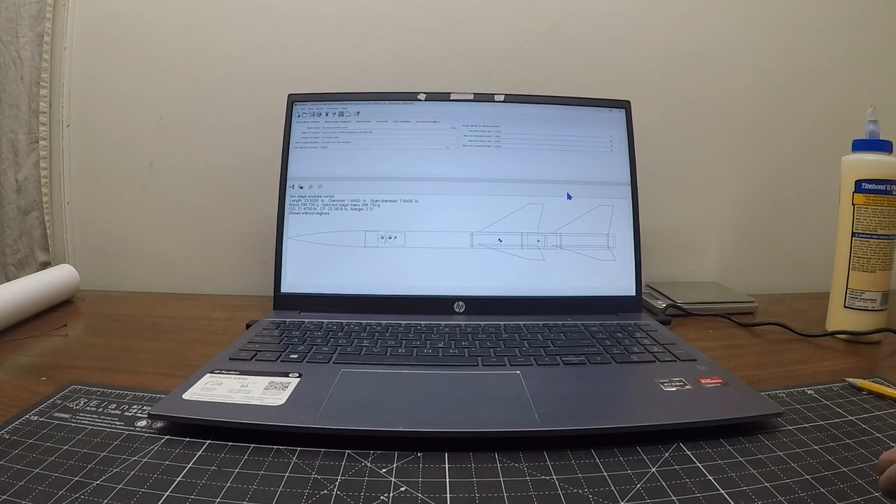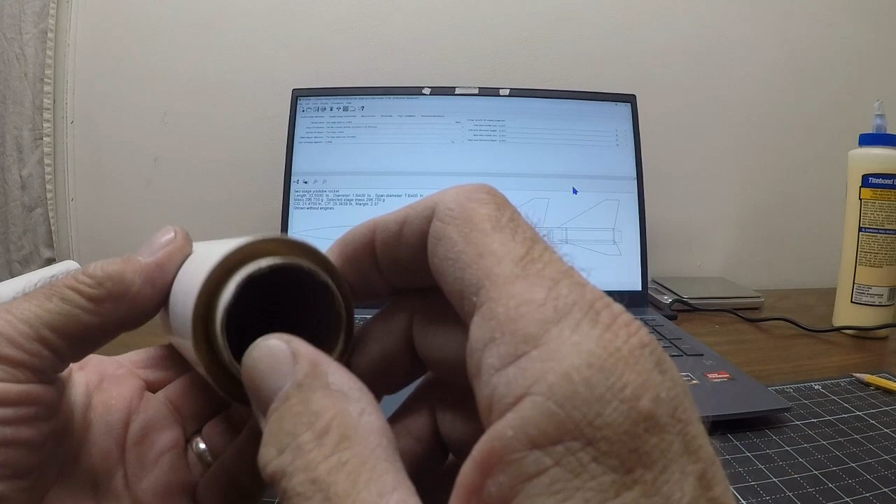So let's get this rocket built. I went ahead and cut the body tube for the booster section, 7.5 inches long, and I went ahead and mounted the engine mount in here. And it's the same exact way as putting it in the main body.

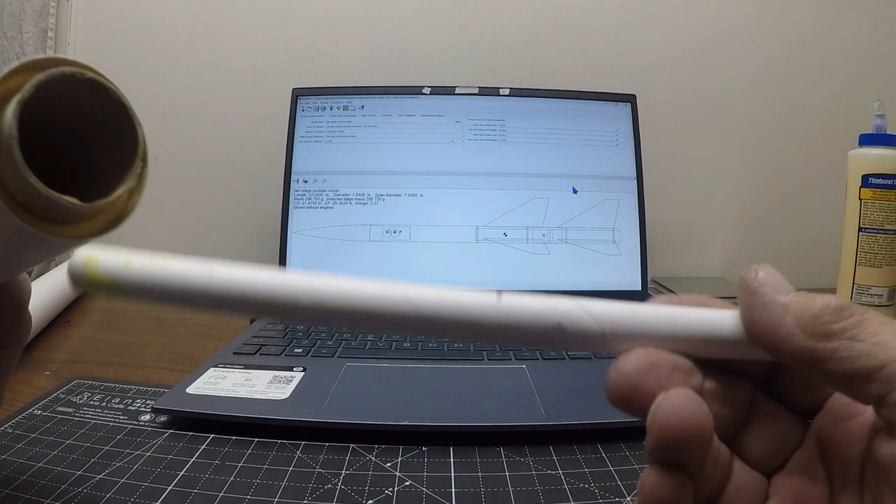I took my glue tube, I marked it at 5 inches and put my glue on the tube and put it on the inside there and slid the engine mount in and left it sitting up like this and let the glue set up for a few minutes until it wouldn't run when I turned it over, and then I glued the bottom centering ring. Alright, and then let that dry and that's ready to go.

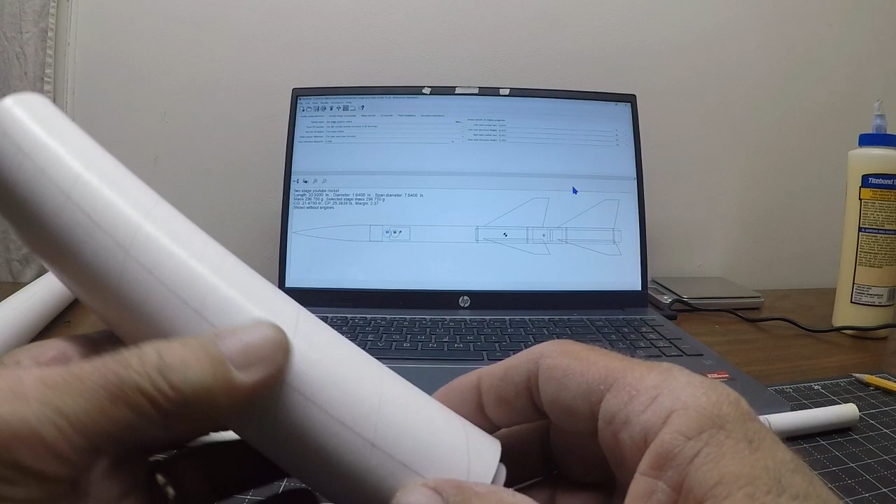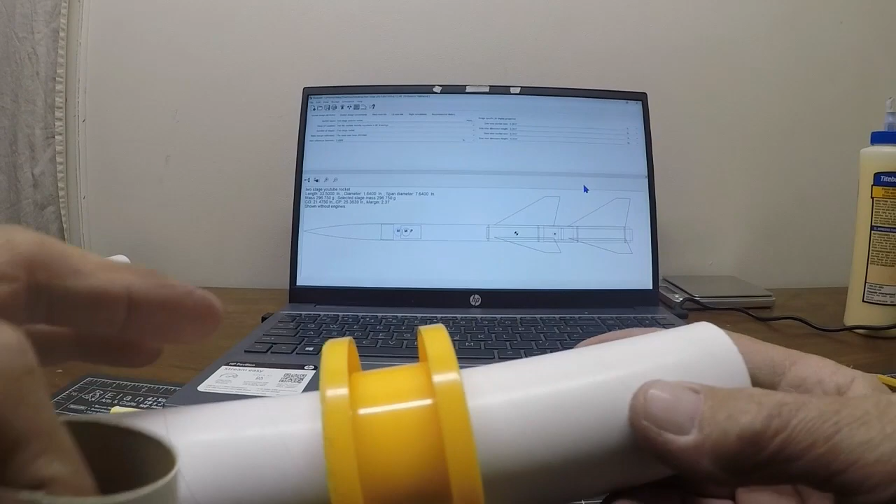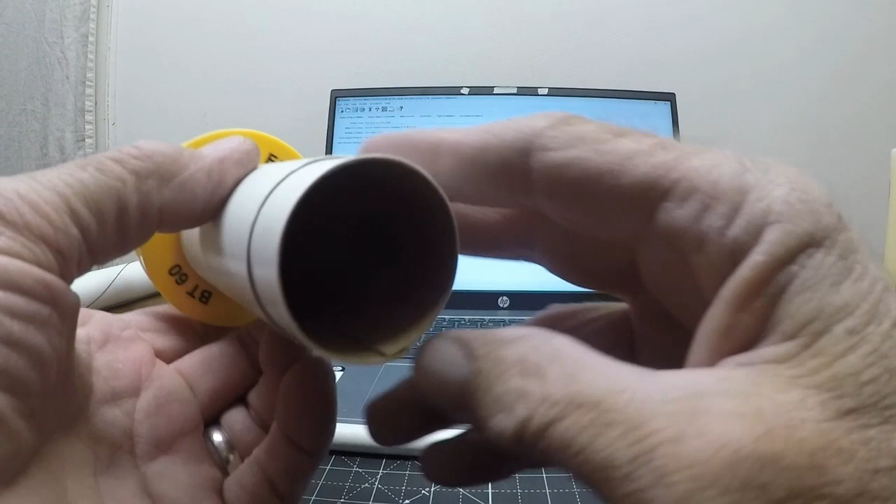And I went ahead and made a coupling because I didn't order one. So this is just an example right here. I took my Estes tube guide, put it on my tube at 3 inches and cut it off. And then you cut a slot down the side of it, and then you put it in the tube and overlap the tube and mark it with your pencil, and then take it out and cut that piece off.

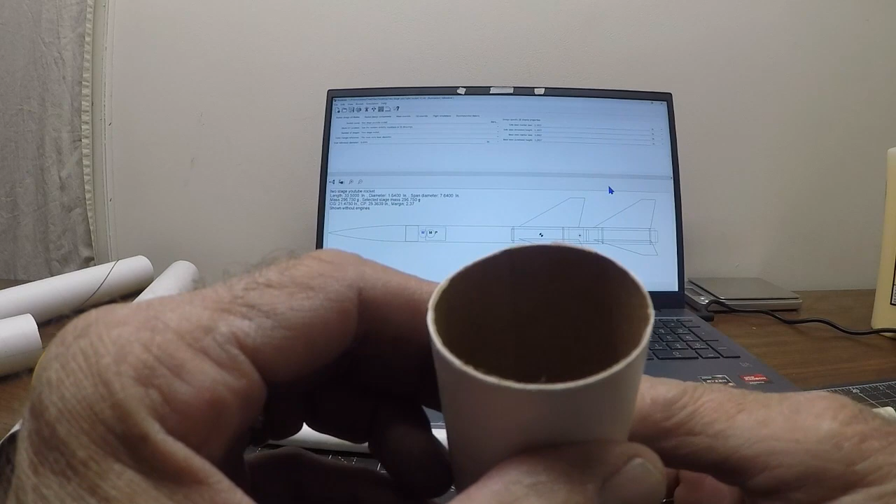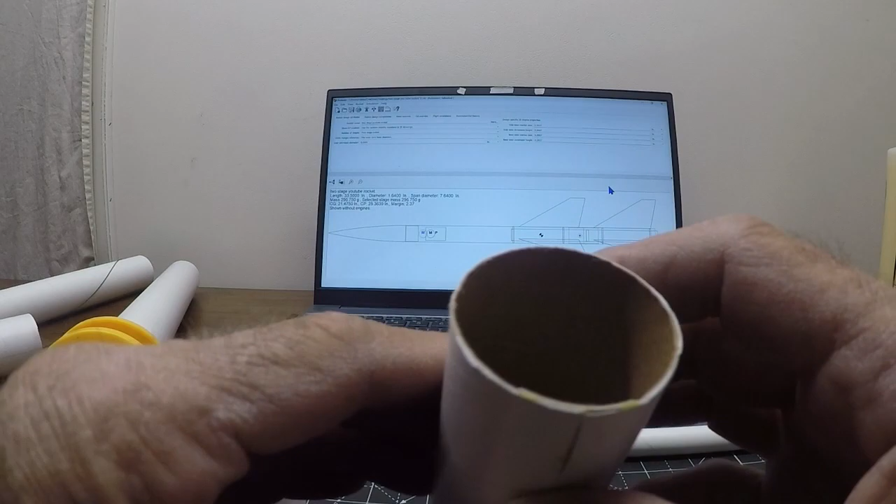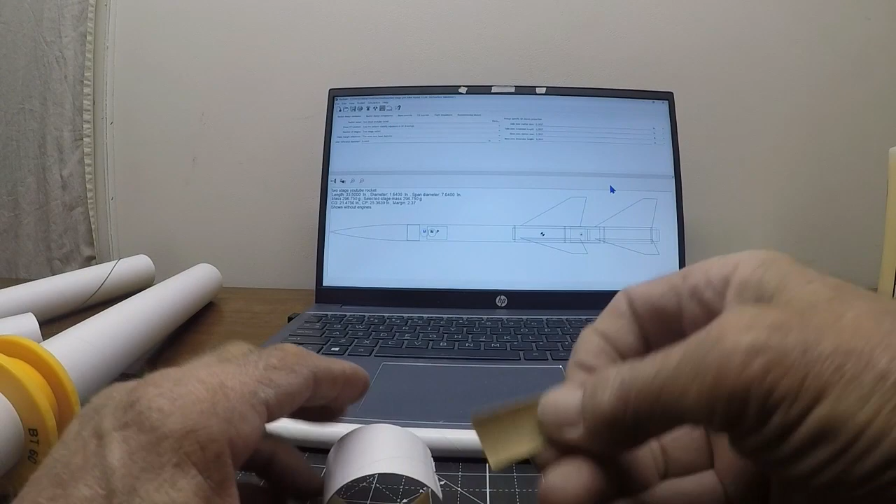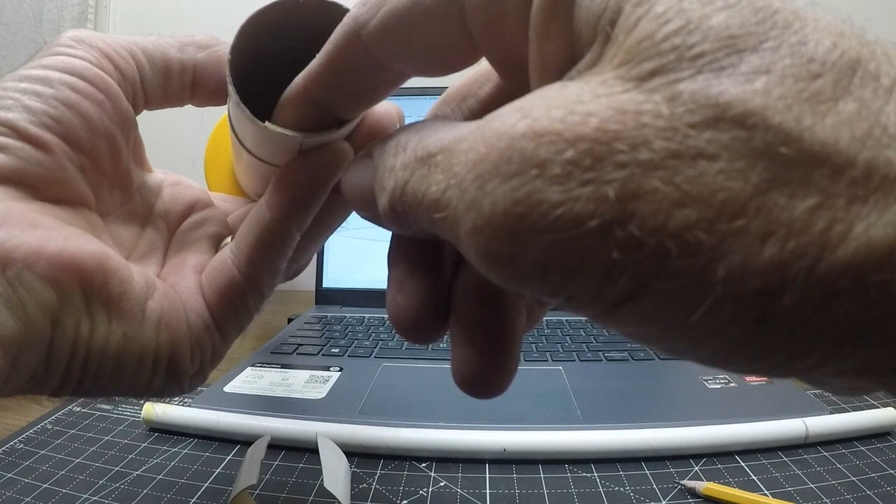And then you can use that piece as your coupling inside right here. Put the tube together, and I didn't cut a very straight line, but it's easiest if you put it in the tube and get it together and then put your glue on your piece that you cut off. So you'll have a piece something like this, but a little straighter. Like that, and then you glue it, put it on your slot right there and let it dry, and then you have a coupling. That's an easy way to make one if you have some extra tube. But anyways, that's your coupling.

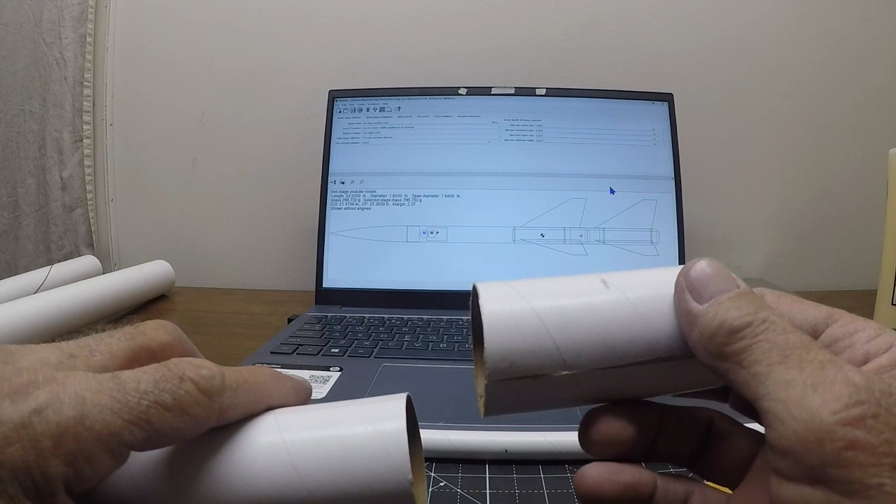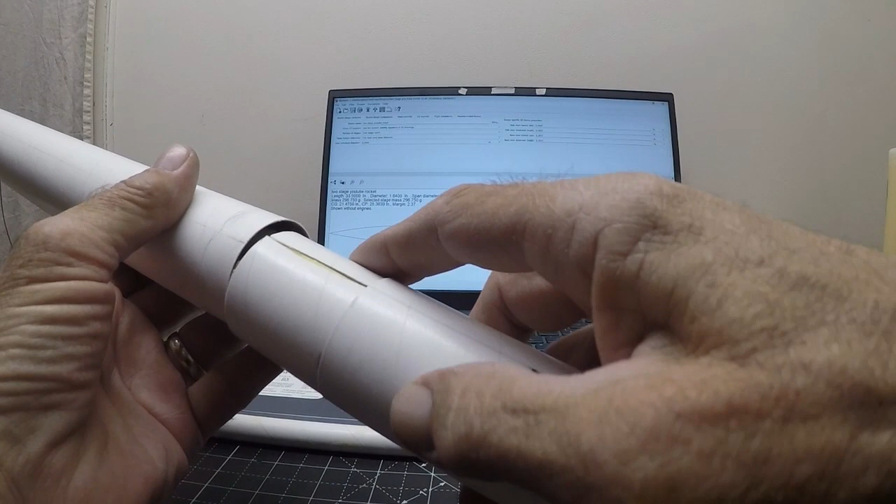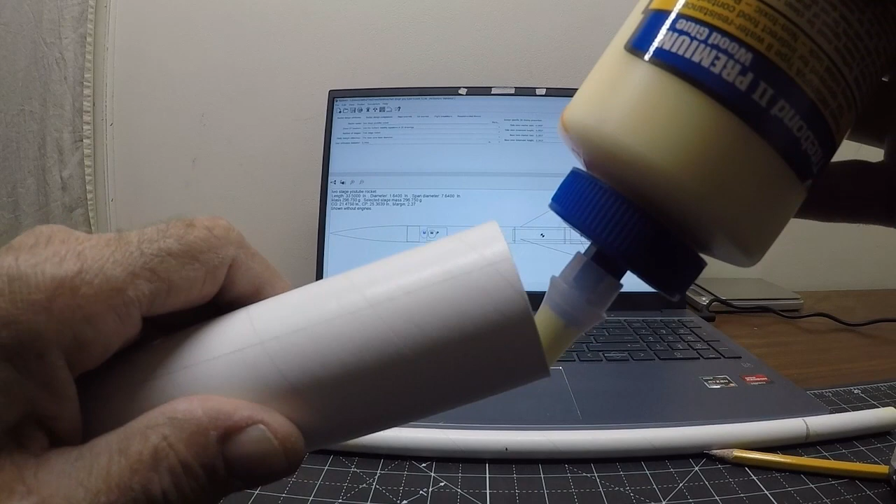So we'll glue this into the booster section, and it'll be permanently into the booster section. And I have it marked halfway at 1.5 inches. And then when you launch your rocket, you put it together, fin lines together, and then it comes out pretty easy, but that'll be glued in, so we'll glue that in. Put some glue around the inside here. And we won't be able to wipe off the excess, but that's no big deal.

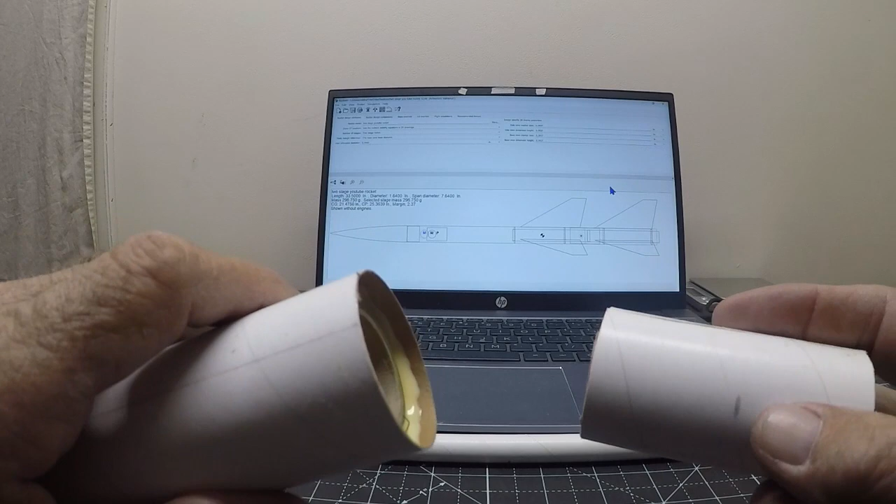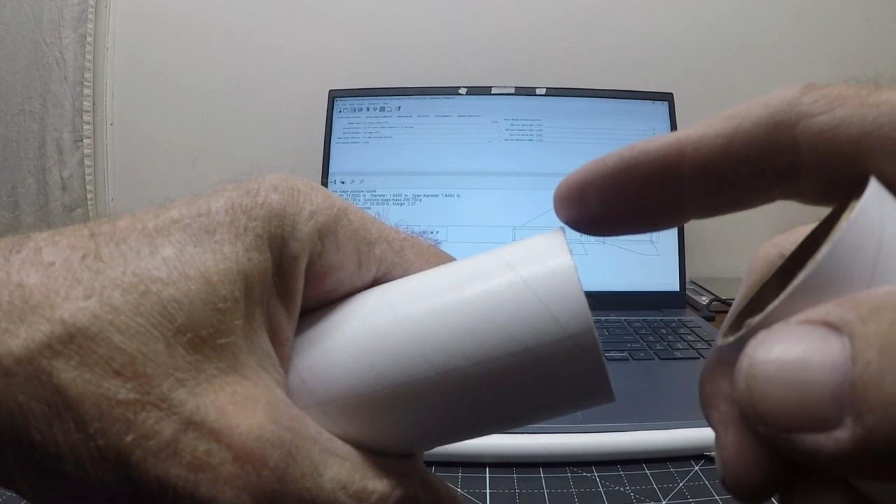And always dry fit your fittings first, because you don't want to struggle with it while you have glue in it and mess up the glue. So always dry fit it, which I did, and you may have to sand the outside of your fitting and ream out the inside of your tube so that it will fit properly. And I already did that. Put it to your line, and we'll let that sit and dry for a few minutes so it won't slide when we work on it.

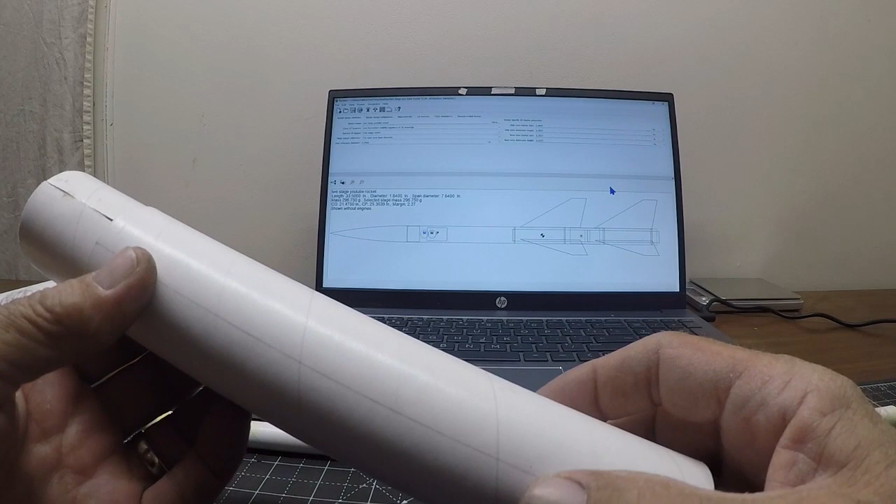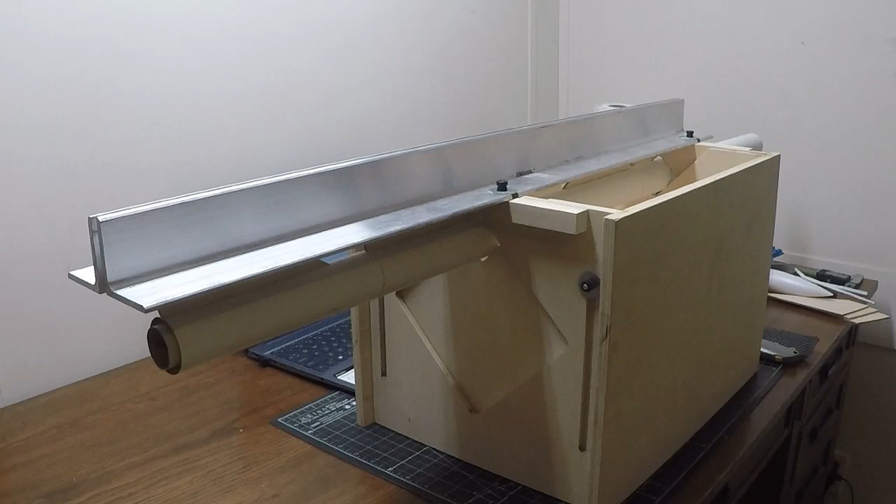And then we'll put this together, and we'll put the fins on. We'll put the body fins on and the booster fins on at the same time and get them lined up. I have a fin jig for that, so I'll show you that. And I'll be back in a few minutes after that sets up. Okay, that didn't take long, did it? I got my fin jig set up and everything. Now all I have to do is lift them up out of there, put some glue on it and put them back down in there. We'll do that.

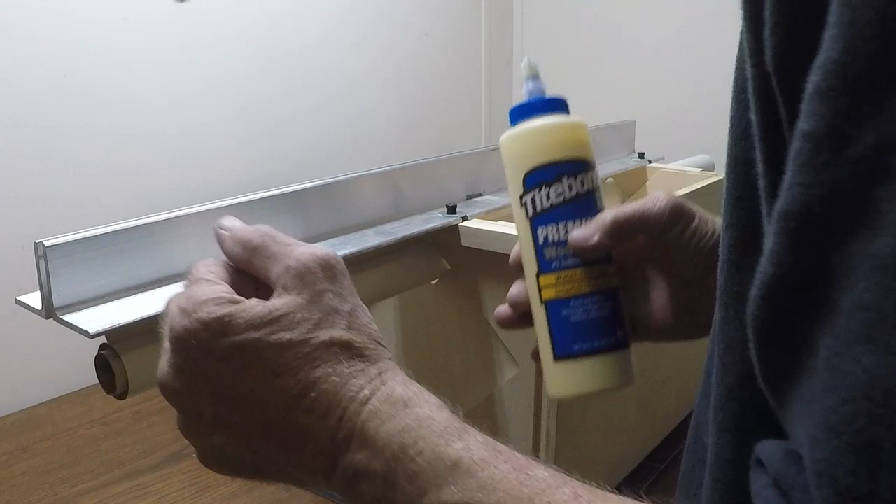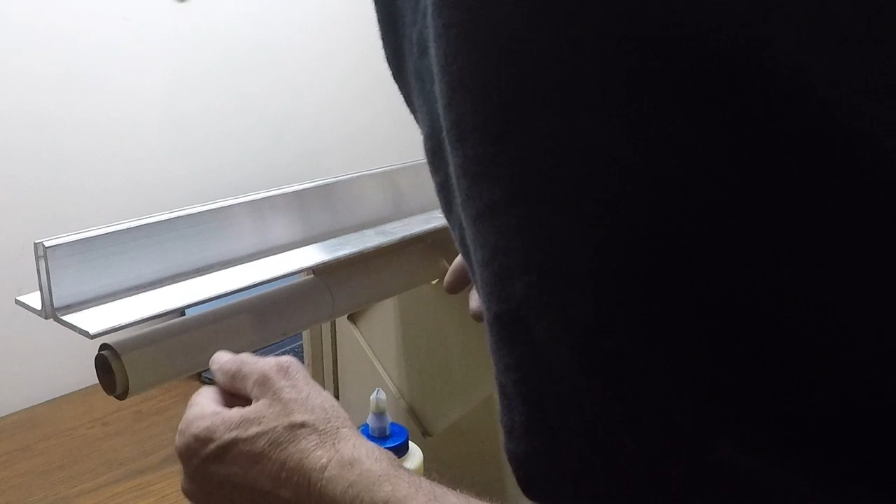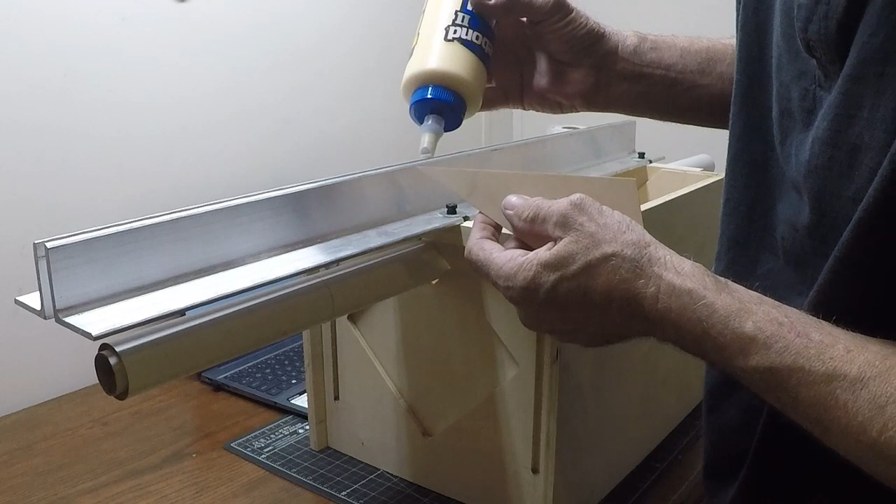I sanded the fins already. Get that back out. And I put a fin up here too for a spacer to hold it just right. And get everything lined up here. And I moved the fins to the back of the tube for the margin because it was 0.86 or something like that, and we need it to be at least 1.0.

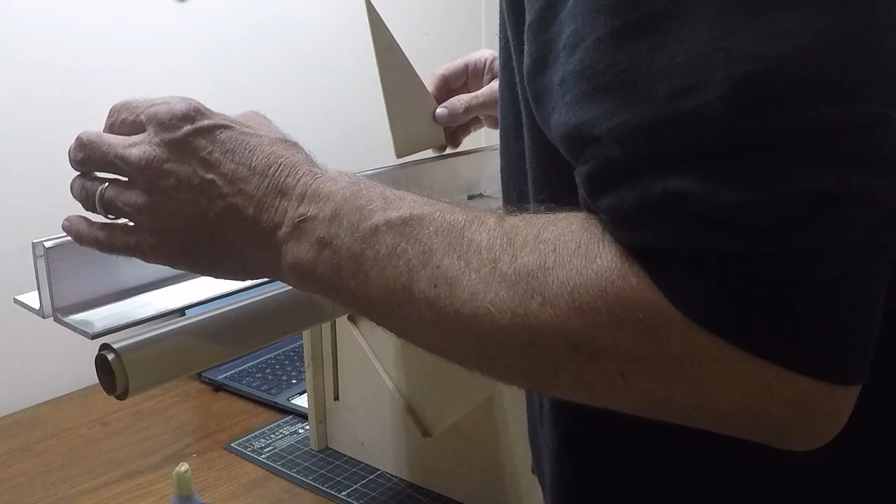And so I moved the fins back, which moved the center of pressure back, which made it a margin of 1.05, which is much better. And then when the booster drops off, it'll be an even bigger margin of 1.40, I think it was. So that's what we want, at least a 1.0. So put the fin back in here, in that spot. Glue on this one real quick. Whoops.

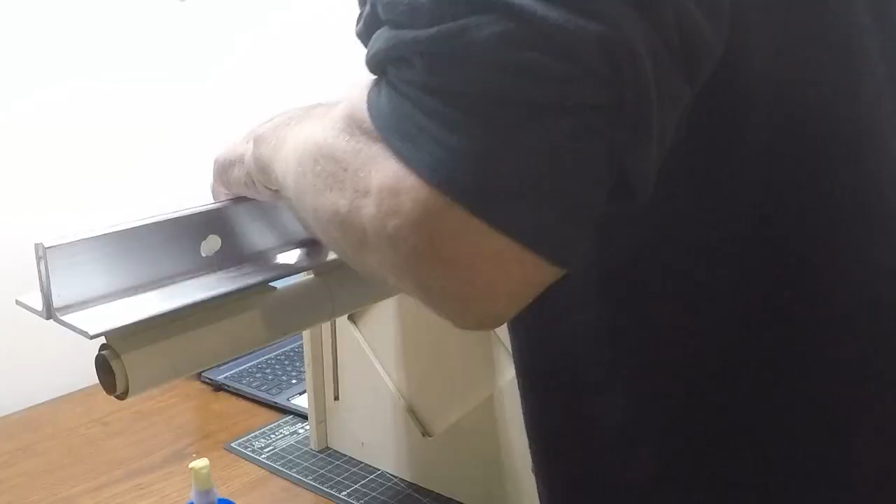Lined up back here, lined up here. Looks like it is. Tighten this up a little bit. We'll let that set up. Okay, we're back. Glue has set up, and we'll take this out. Take that fin out of there, the spacer, and lift this up. Oops. Loosen up the nuts there. Lift this up. Turn it.

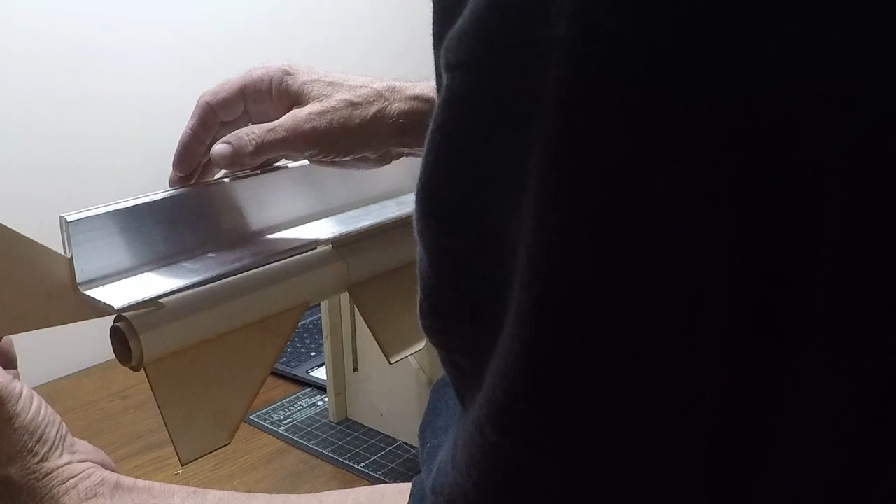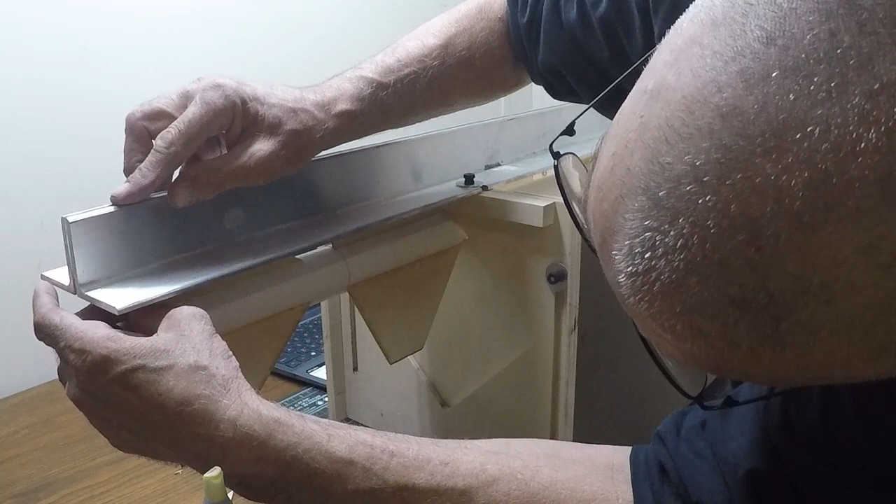There's the other line. Put a fin up here for a spacer. Get it lined up here. Lined up here. All lined up. I'll put some glue on that. Go ahead and do that. Right to the end of the tube. Oh, right. This one out. Okay.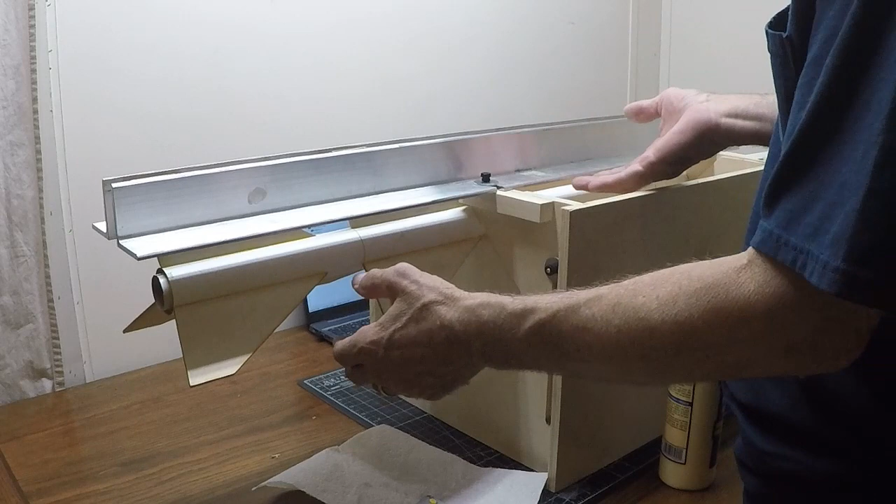Make sure both ends are lined up straight. I'll do that once more after this, and I'll get back to you. I have all the fins on. Now I need to make some fillets on the fins to make them stronger. Okay, then we'll put some fillets on.

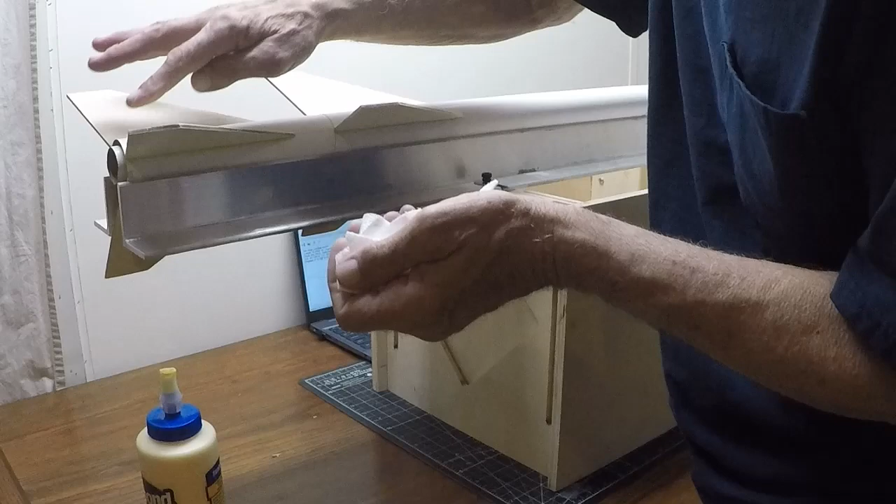I do 2 fins at a time. It's awesome because I have this jig. I can do the booster and the sustainer fins at the same time, which is pretty cool. Get them perfectly in line. Smooth that out like that. Smeared that one a little bit too much. That's alright. And we'll let those set up, and I'll do the other 2, and then I'll be back in just a second.

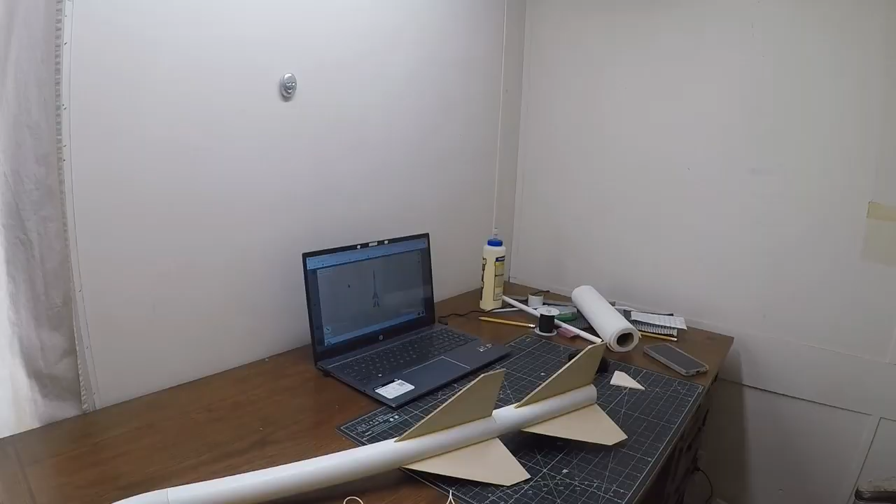Okay, I'm back. I have the fins all glued on and the fillets all done. These fins look pretty nice and straight. I like that. Fin jig works nice. So now I need to paint it. I have my parachute. Still going to use the 15-inch parachute. Got the nose cone on here and all that. But I'm going to paint it.

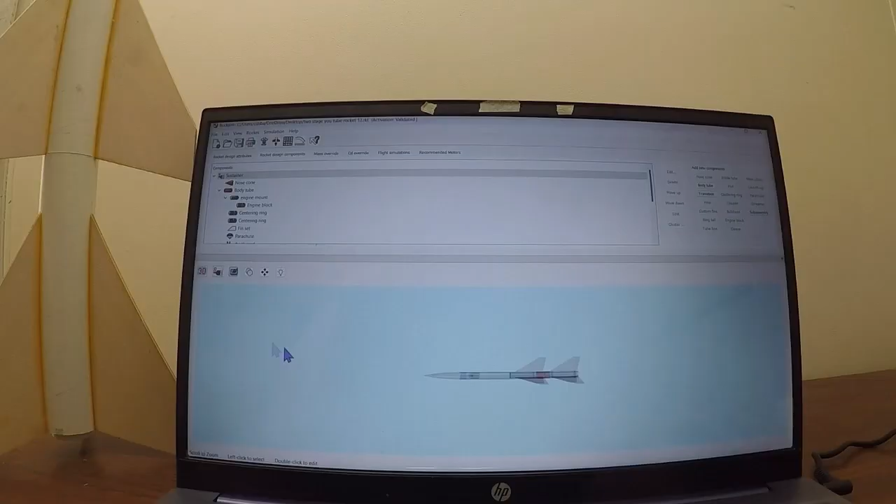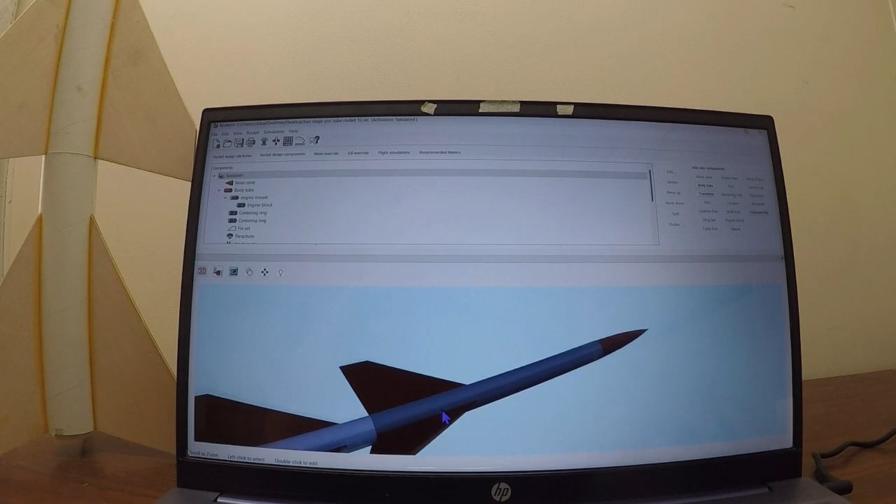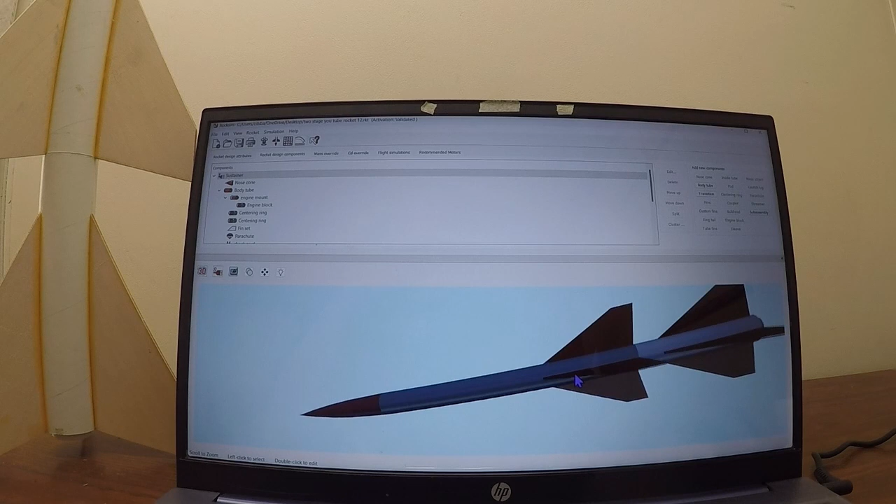There's a 3D in RockSim. That's a see-through version. And that's what it'll look like. Well, that's not what it's going to look like, but the engine blocks, centering rings, the tubes, engine block up there. It's pretty cool. Oh, trying to roll it around. Alright. Okay. Time to paint it.